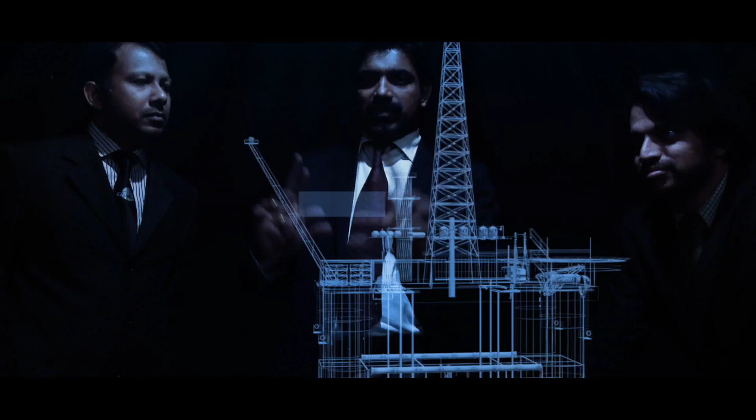Aries One provides engineering services to the entire range of assets and activities, right from upstream to downstream sectors that define the offshore, oil and gas, and shipping industries. Our team has expertise on engineering services that covers the entire life cycle of assets, from design, construction, transportation, installation, operation, asset management, inspection, life extension till decommissioning.

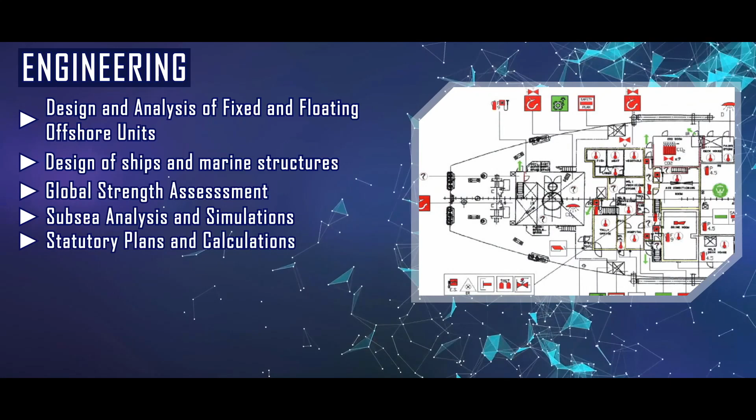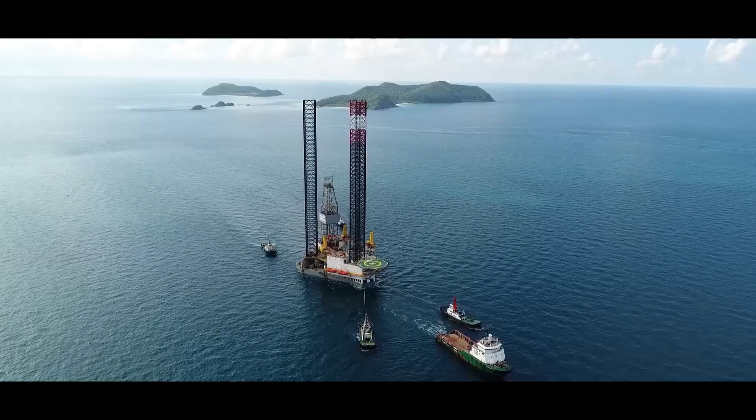Hydrodynamics engineering division under Aries One deals with how ships and offshore structures interact in different seas under varying environmental conditions and surrounding fluids. The division performs analysis jobs for safe navigation and cargo transportation, response of vessel motions on surroundings, operability for offshore operations and hydrodynamic responses during marine installations and response of station keeping systems.

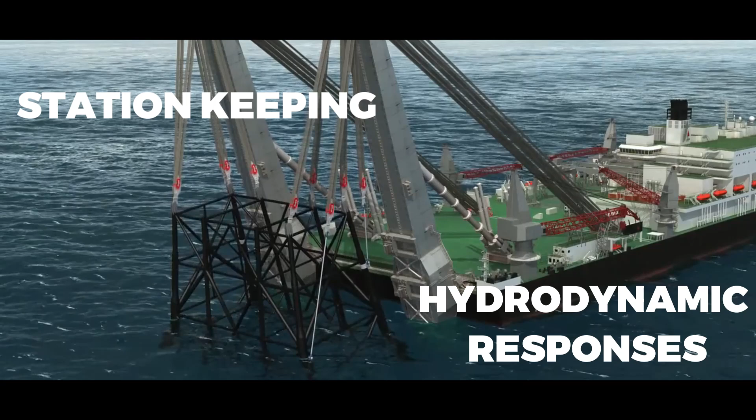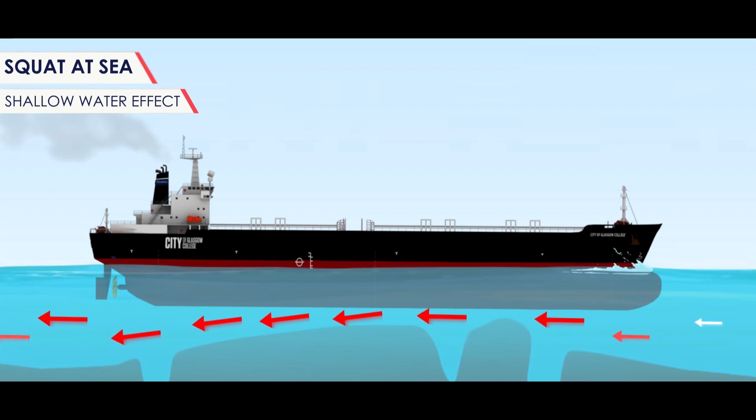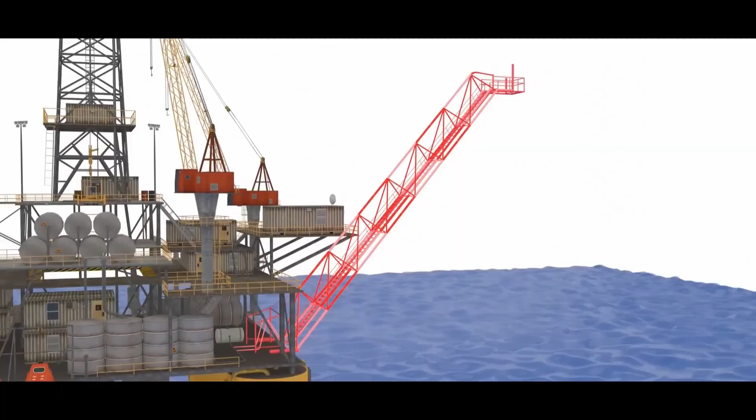Hydrodynamic analysis in general includes various dynamic studies of the floating structures including the ship motions, mooring, offshore operations and installations, resistance and powering, ship maneuvering, subsea operations, etc. The hydrodynamic wing performs a key role within the Aries Group in planning operations for major projects of vessel owners and oil and gas industry clients.

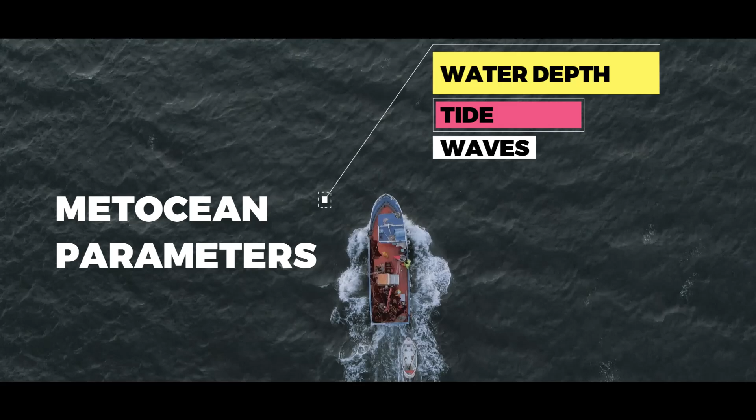Environmental parameters and metocean conditions play a key role in the hydrodynamics of the floating objects. Few of the environment conditions considered are water depth. Water depth of the seas over the world varies from few meters to 1,000s of meters and does play an important role in selection of the moorings and also on the wave and current loads acting on floating vessels. Tides, varying from low tide to high tide, are important to be analyzed specifically for quayside and terminal moorings, fixed mooring operations, lay operations, etc.

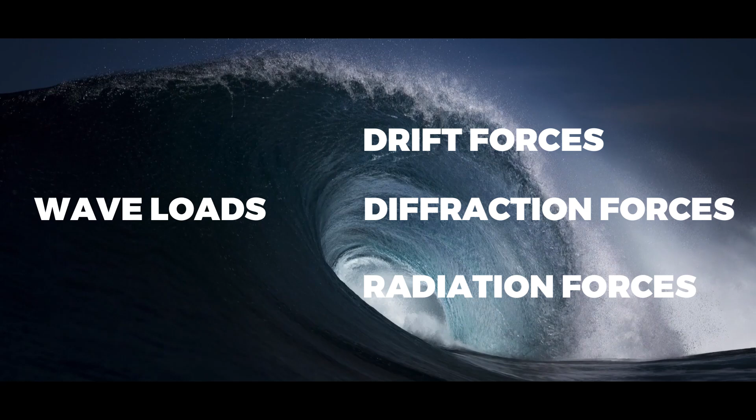Waves on ships and offshore structures are the key component which eventually estimate the dynamics of these floating structures. The most important part of the hydrodynamic analysis is to estimate the wave load components on the ships, including drift forces, diffraction and radiation wave forces. Accordingly, the location of projects with respect to the weather scenario plays a key role in hydrodynamic analysis and limitations of offshore operations. Therefore, further understanding of hydrodynamics can aid in planning ahead for safer marine operations and station keeping.

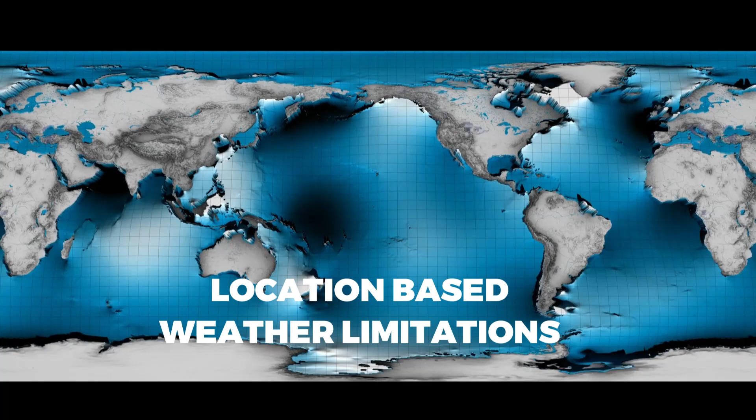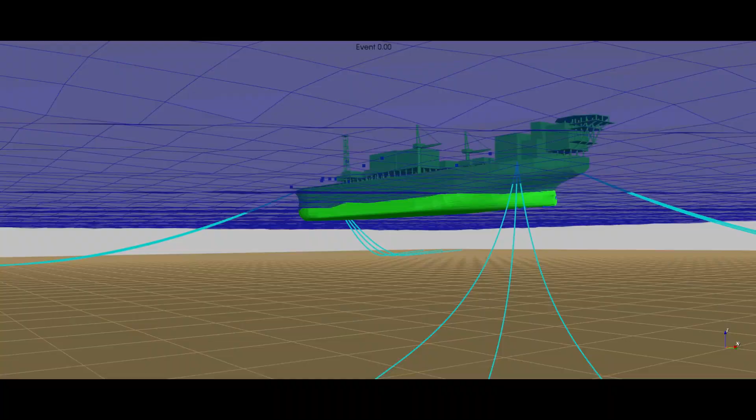Various job scopes performed under the hydrodynamics team include mooring analysis. The term mooring refers to the system for securing or station keeping of the vessels. Shipboard operations such as mooring at terminals and quayside moorings, spread moorings, single-point moorings, multi-buoy moorings, emergency towing, tug handling, barge mooring, canal transit, anchoring shall fall into the broad category of mooring and thus require specialized fittings or equipment on board.

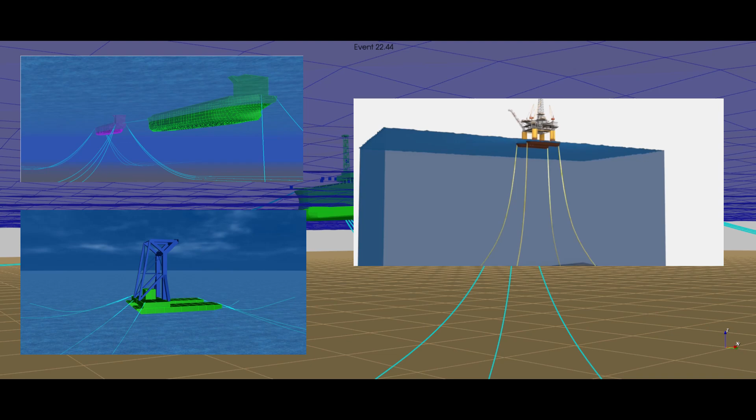Single-point mooring, where a vessel is moored to a single point allowing the vessel to weather vane around the mooring point. This mooring or anchoring can be achieved using anchors and shipboard mooring fittings. Multi-point spread mooring, where a vessel is moored to 2 or more points/buoys. 4 to 8 point mooring shall be common for smaller vessels and barges. However, 12 to 16 point moorings shall be required for larger vessels and installations like FPSOs, tankers, semi-subs, etc. Spread mooring shall be commonly used for mooring near assets and for specific operations, as these aid in limiting the vessel excursions compared to single point moorings.

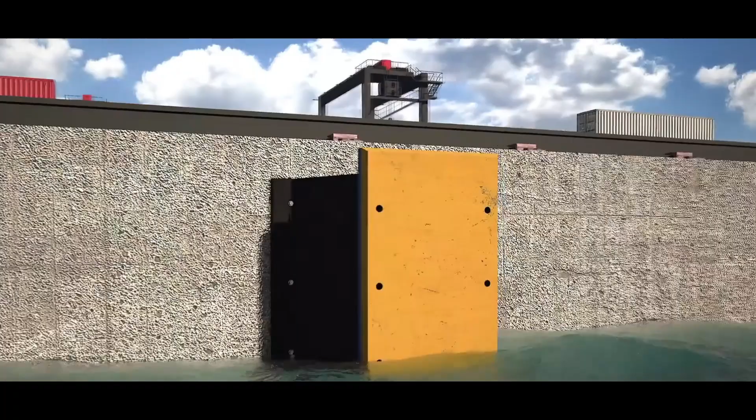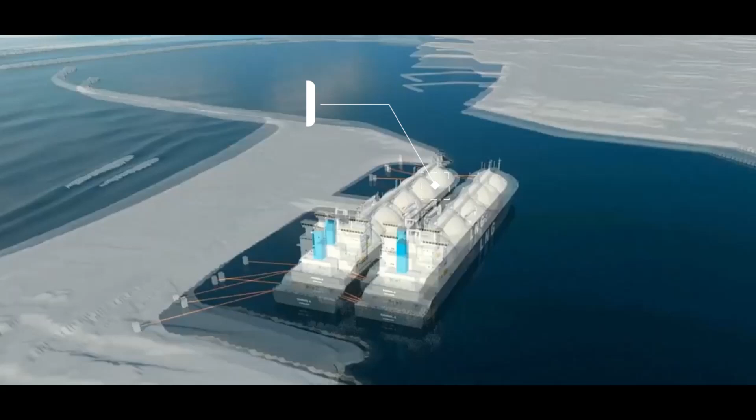Quayside mooring, where a vessel is moored to a quay, jetty, pier. Quayside moorings are attained using the existing mooring hooks or bollards available at the quay. Fenders are also an integral part of this system, absorbing the vessel loads for the oncoming headings. Turret mooring, which is common for FPSO, FSO type vessels, where the ships are permanently moored with a turret at the midship or forward, while carrying out oil production and offloading respectively. Ship-to-ship mooring, where two ships are moored with each other, common for tanker offloading operations, where the vessels are required to be in close proximity to aid in transfer operations.

Expected outcome of the mooring analysis depends on the type of mooring. Offshore mooring analysis outcomes can range from sizing of the mooring fittings on board, capacity estimation of the anchors and mooring lines, determination of the maximum vessel motions, selection of limiting design and operating environments, weather limitations for offloading or transfer operation, and so on. Mooring analysis is also an integral part of design of terminals and quayside jetties, whereby the analysis provides limiting scenarios for berthing, unberthing and transfer operations. The analysis shall aid in the selection of fenders, bollards, quick release hooks and other mooring fittings.

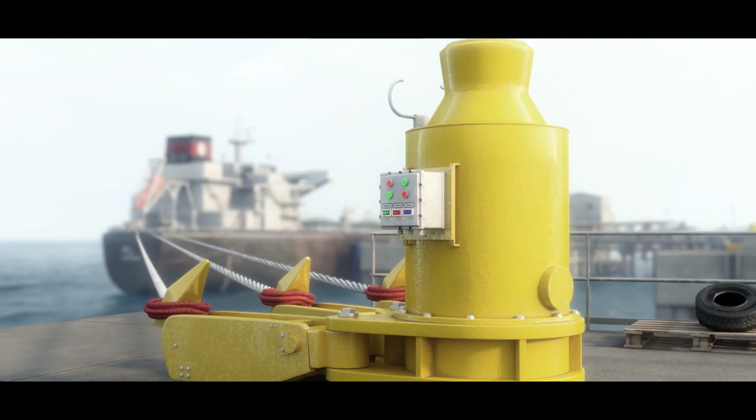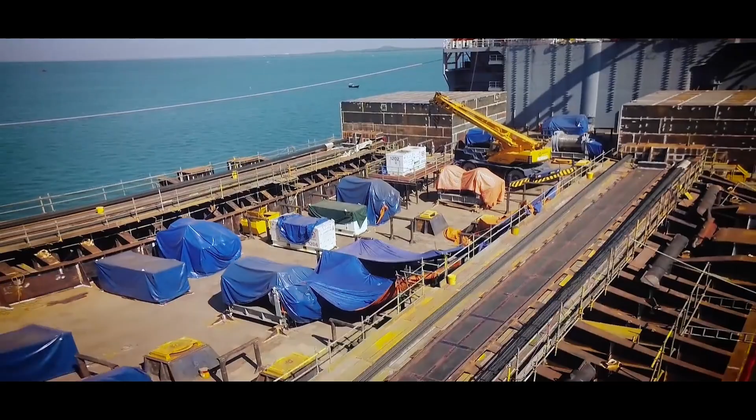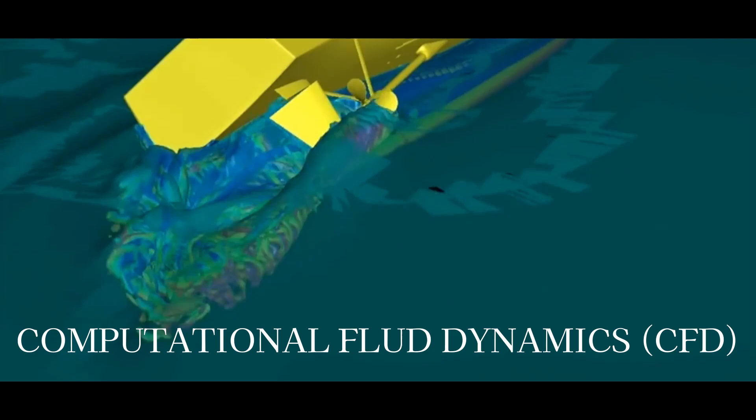Transportation analysis. It includes the motion response analysis during voyages, seakeeping and green sea analysis, towing analysis, etc., where the vessel motions and response during navigation and maneuvering are analyzed. Background for estimation or analysis of various hydrodynamic behavior of ships and floating structures began with ship model testing, which dates back to the 19th century. Today there are various proven and tested approaches and methods which aid in ships' operations and station keeping. Predictions include model testing in model basins, computational fluid dynamics, potential flow/panel code methods.

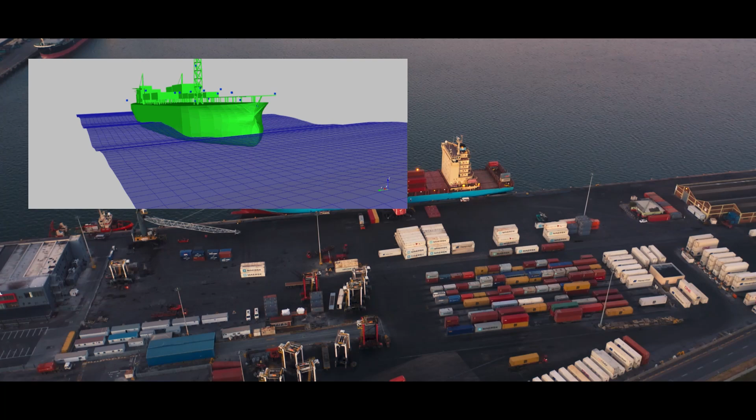Aries Marine uses industry standard software in combination with class rules and widely recognized standard guidelines in prediction of vessel motion and responses. Few of the software used for hydrodynamic analysis and simulations are MOSES, a hydrostatic and hydrodynamic software for simulation of offshore operations; Optimoor, an easy-to-use mooring analysis software for all types of mooring with inbuilt OCIMF recommended methods and formulae with the capability to model static, dynamic, wave response, ship-to-ship, tsunami, passing ships and many more.

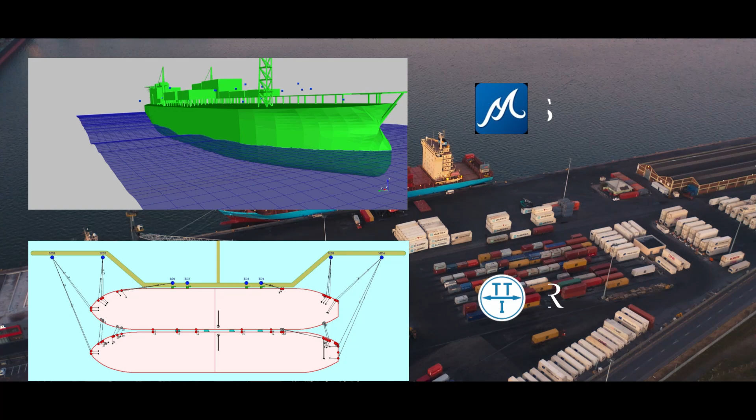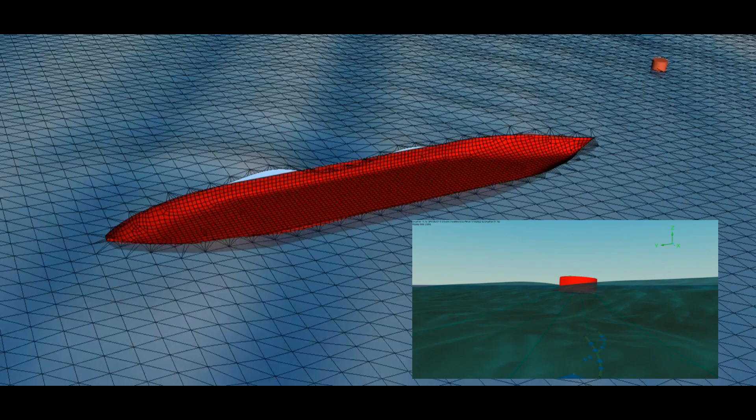OrcaFlex, a comprehensive general-purpose dynamic analysis software for offshore marine systems, which include riser systems, transport, installation and decommissioning, moorings, pipe lays and pipelines, renewables, towed systems and numerous other applications. HydroStar, an advanced hydrodynamic software for seakeeping analysis, extensively tested and validated through comparison with semi-analytical studies, numerical results from recognized tools and experimental data.

MIKE, a comprehensive dynamic mooring analysis software which can assess truly and accurately the dynamic effects of wind, current and local wave climate on moored vessels with highly precise vessel response assessment, multi-body interactions, and ability to analyze automatic mooring systems used for port operations planning and design, and also mooring equipment location optimization in shipbuilding, mooring equipment design, and can also be used for design and analysis of oil and gas terminals.

Hydrodynamic analysis is performed in line with the recommendations and guidelines, including classification society rules specific for notations and vessel types, industry standard guidelines like API RP 2SK, DNVGL-ST-N001, OCIMF recommendations, PIANC recommendations.